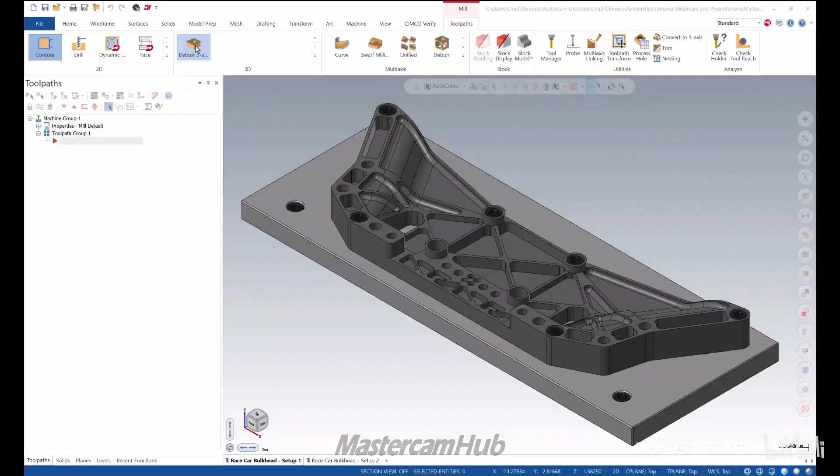We're gonna open a deburr 3-axis toolpath here with a ball mill. Just like before, I'm gonna define my entire solid body. And I'm going to constrain this to one single loop. If I hold down the shift key and click, we're going to chain this entire tangent loop. And let's say I want to make a 7/1000 break edge. Say OK. And we're given a really nice looking deburr toolpath.

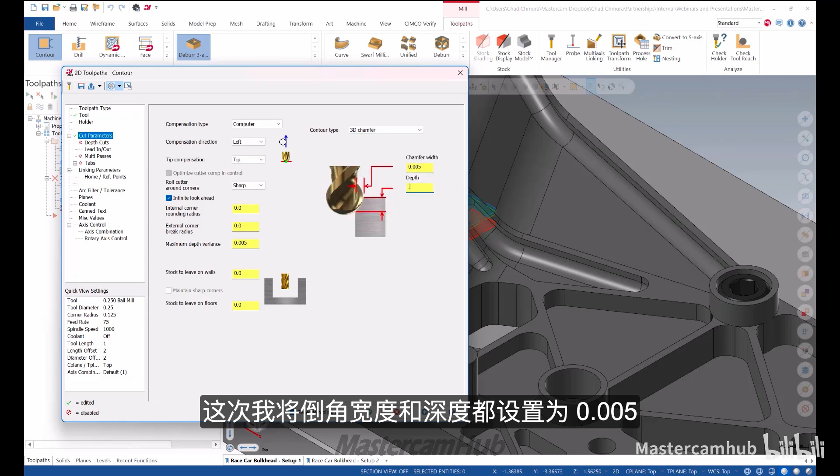Let's do the same thing with contour now. Shift click, just the same. Make sure our ball mill is selected. This is a 3D chamfer this time. And for this, I'm going to say it's about 5/1000 width and 5/1000 in depth. That's going to give us about a 7/1000 chamfer to be equal. And there's that toolpath. So let's select both of these toolpaths and go into verify, and I'll show you just how the comparison between them looks.

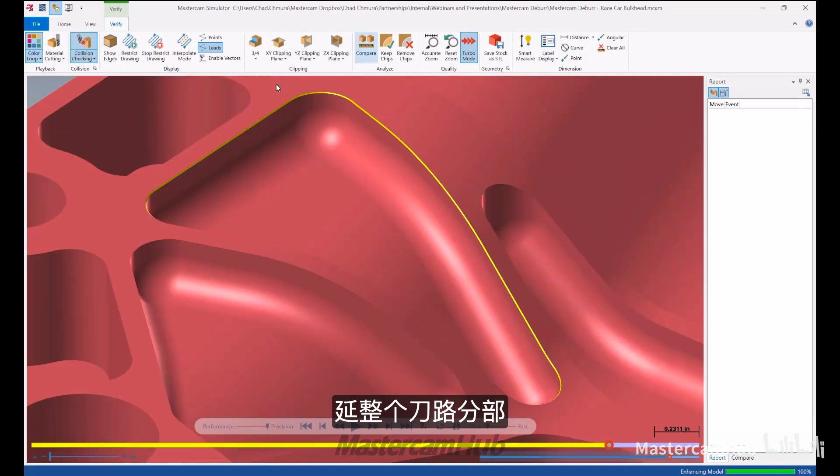So here we can see the result of that deburr toolpath. This is a beautiful uniform break edge all the way around this path. Now, if I just skip right to the end of the contour toolpath, watch what happens. You can see this entire wall of the part is over-engaged by the cutter, and everywhere else where there's flat seems to match up perfectly. So really the contour is a great option as long as you're working on nice, simple, flat geometry. But as soon as there's a slope involved, the deburr toolpath again becomes the clear-cut winner.

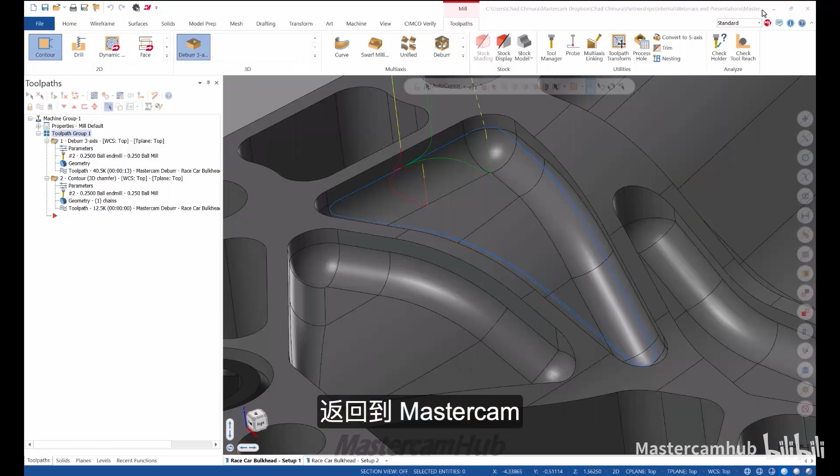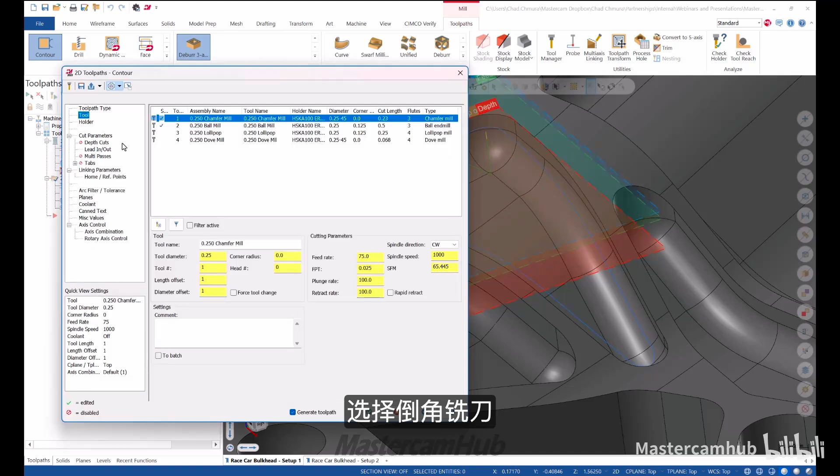Back in Mastercam, this exact thing is also true when you change over to chamfers. So we could either add multi-pass chamfering with a deburr toolpath and a ball mill, or I can select a chamfer mill, and let's go up to say 20/1000 of width, and do the same thing in our contour toolpath as well. Chamfer mill, 20/1000. Here we have to manually make sure that our top or bottom offset is acceptable. This toolpath may or may not generate the first time. Looks like we're good. Run it and verify.

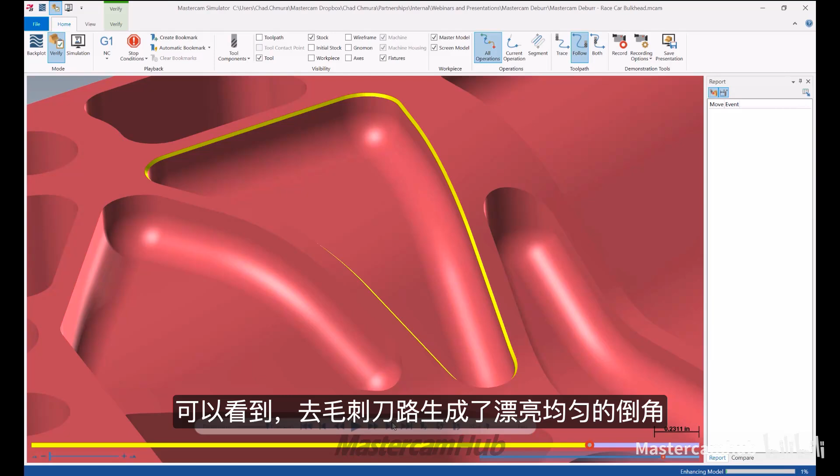So I skipped right through the deburr toolpath, and again, we have a beautiful uniform chamfer. Skip to the end of the contour, and again, it over-engages, and you can see down at the bottom here as the slope begins that we have a much larger chamfer, and it kind of varies and becomes less as it reaches the top of the part.

So from here, again, we can see that deburr is not only faster, it is more accurate than the classic options in Mastercam. And not only is it more accurate, it is far safer. In the next video, we're going to talk about the collision awareness that the deburr toolpath has.